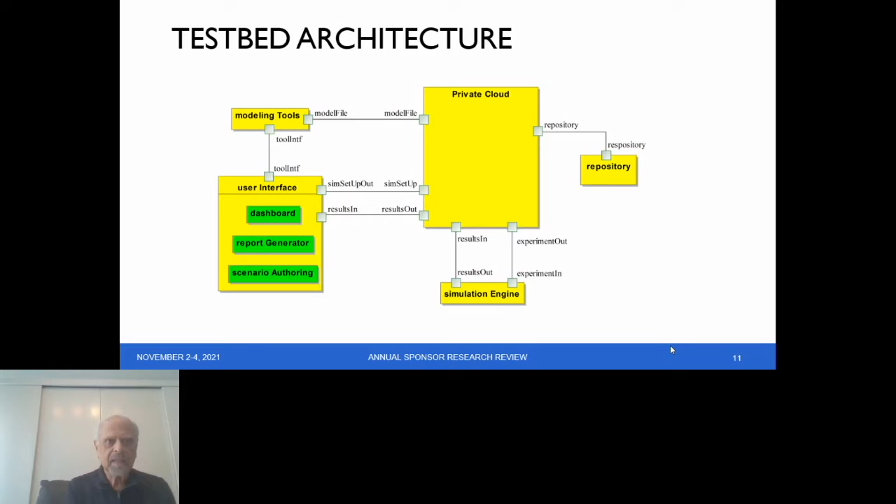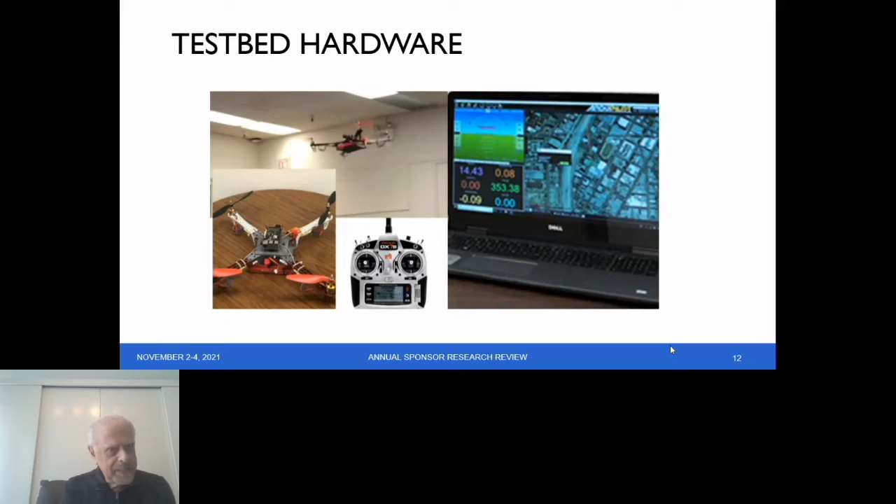The test capabilities: we offer a scenario builder to model and import scenarios from third-party applications. The testbed offers monitoring, visualization, and control of the simulation. We have a digital twin capability that we can create and use in-system simulation. We have the ability to control both the physical vehicle, which in this case is a quadcopter, as well as a virtual model of the quadcopter.

The data collection capability is based on the vehicle-mounted sensors that are used for post-hoc analysis. And we have the ability to capture the execution trace, which is the scenario execution audit trail, which is displayed on the dashboard.

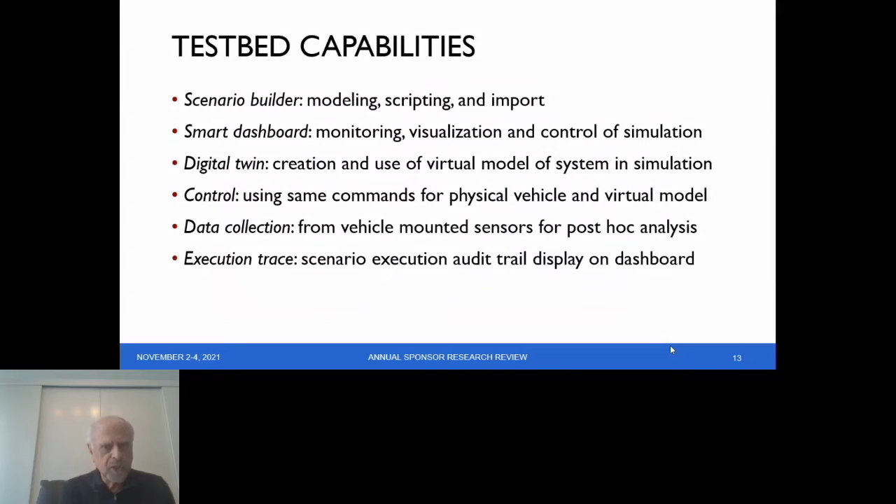The standard vehicle in this case is the physical quadcopter model. It's a pretty clean, simple design, which has ease of assembly, crashworthiness, which means it can crash without damage. And this is a lesson we learned. We needed to have something that was fairly robust to crashes as we were experimenting with it.

We have software that employs a discoverability component, which automates the vehicle network communication. It provides a plug-and-play capability, and the manual setup of vehicles using IP addresses is no longer needed with this capability.

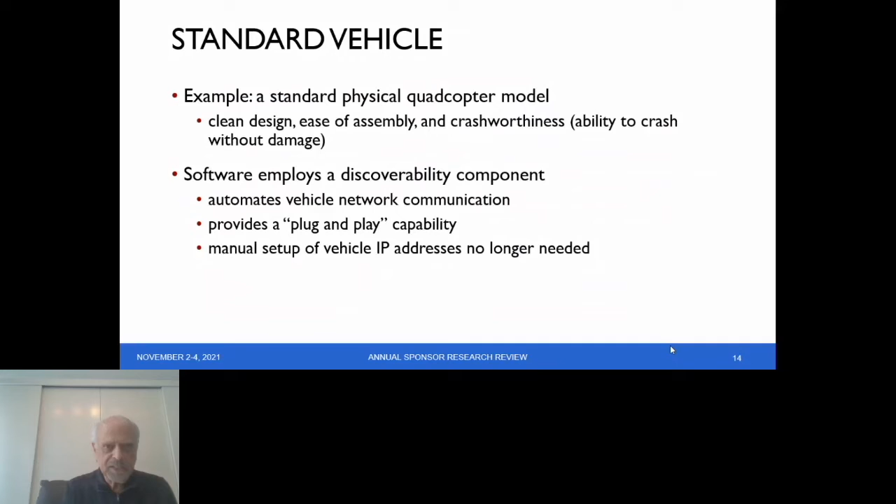The smart dashboard is scenario-driven. Importantly, it allows users to import scenarios. It's context-sensitive. Its layout is customizable. You can lay out the various panes on the dashboard according to your needs. It provides a default display option that gives you a plan view, which is also called the mission view of the world, showing the vehicles in that particular terrain.

It has various camera views. It has vehicle state indicators, and it has resource status indicators. It has the ability to accommodate human intervention. And when humans do intervene, they do so to either retask vehicles or to reallocate resources. It has an audit trail display capability that shows you when vehicle states change during the execution of the mission.

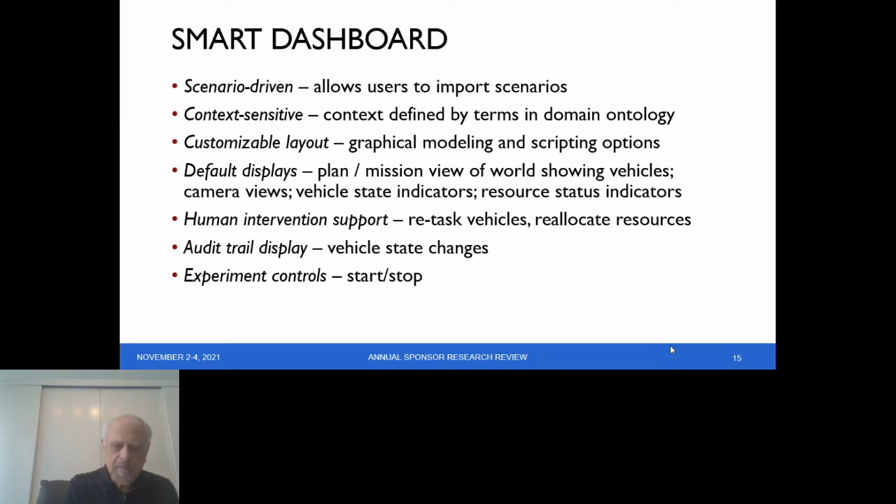And of course, we have the ability in the dashboard to set up and control the experiment. So you have start-stop facilities as well in the dashboard. The testbed provides a user guide. The user guide consists of a starter kit of predefined scenarios. Here, the users can use scenarios right out of the box in a simulation environment and later in the physical laboratory.

We also provide multi-vehicle control algorithms. Two types of algorithms are provided: a rule-based model, which is a deterministic algorithm, and a partially observable Markov decision process model, which is a probabilistic algorithm. We also provide scenarios and control algorithm documentation, and that contains basically how scenarios and algorithms can be created, and how scenarios and algorithms can be modified.

The scenario in our case is an aircraft perimeter security scenario. The context is that of a C-130 troop transport aircraft which has landed on an airstrip. It needs to maintain close surveillance of the aircraft perimeter. That's the challenge. The collection assets, or the sensors, if you will, are building-mounted video cameras and quadcopter drones with downward-facing cameras. So these are the two collection assets that collect the data in terms of maintaining the perimeter security of the aircraft.

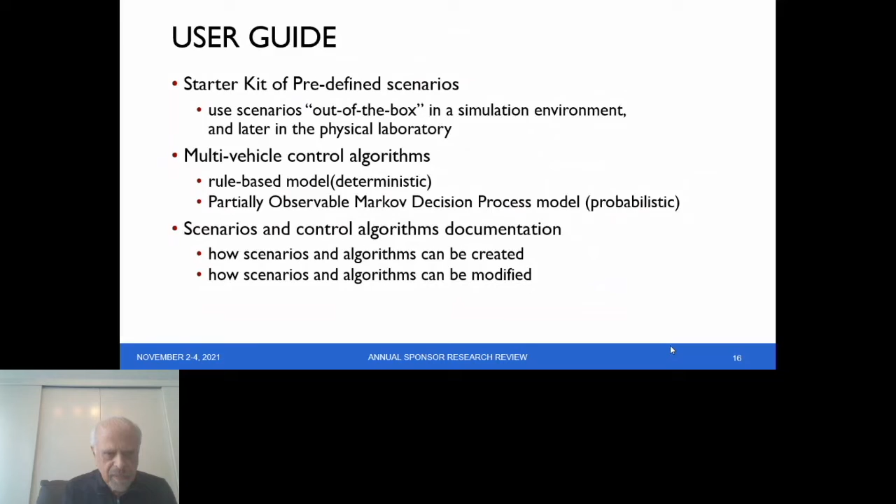The goal here is to maintain video coverage of the aircraft perimeter despite disruptions. And disruptions could take the form of, you could lose a drone, or you could have loss of a building camera. And of course, then you have to readjust your coverage so you can restore it the best possible way you can. The actions that you have available in this case are simple and compound. You can reposition a currently flying drone, you can launch a reserve drone, or you could do both.

System states are displayed using color codes. Green means you have full coverage of the perimeter. Yellow means that you're responding to a disruption. Red means that you lack the capability to restore full coverage. And if it's red, the cyber-physical system alerts the commander to intervene.

So here is the actual software implementation that is part and parcel of the testbed. In this particular case, what you see is the dashboard that shows you the scenario simulation. The problem domain, again, being addressed here is the perimeter security of the stationary aircraft that you see in the left-hand mission view window. The top right window presents a selected camera view. Below the mission view, to the left, is the mission log that presents all the state changes for all the vehicles involved in the mission.

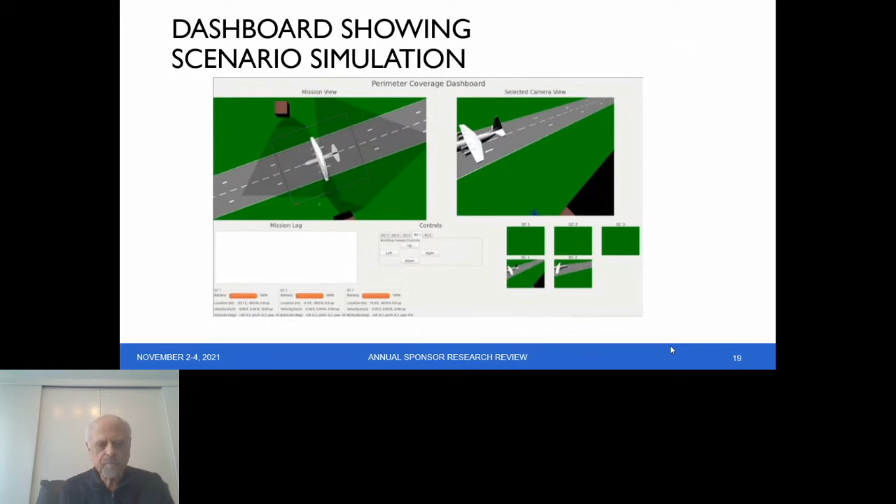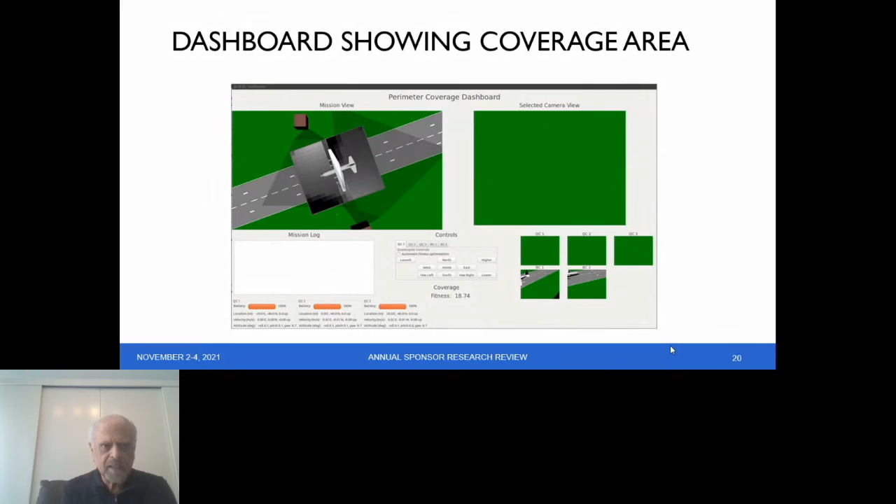In this view, you see the dashboard that shows the coverage area. The quadcopters in this particular case have not been launched yet. So the coverage that you see here is due only to the building cameras. And that's what you see in the left. All those shadows and things like that, the coverage that you see are the building cameras and the coverage that they have achieved. And it's strictly with those static cameras that you see that coverage, because no quadcopters have been launched so far.

A fitness function, by the way, is a particular type of objective function that is used to summarize as a single figure of merit how close a given design solution is to achieving the set of aims. So fitness functions are typically used in genetic programming and genetic algorithms to guide simulations toward optimal design solutions. We use that here to maximize coverage.

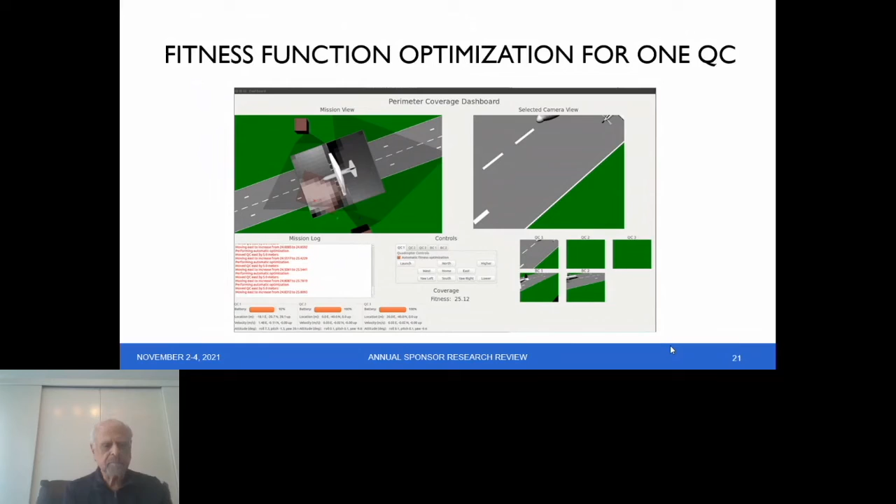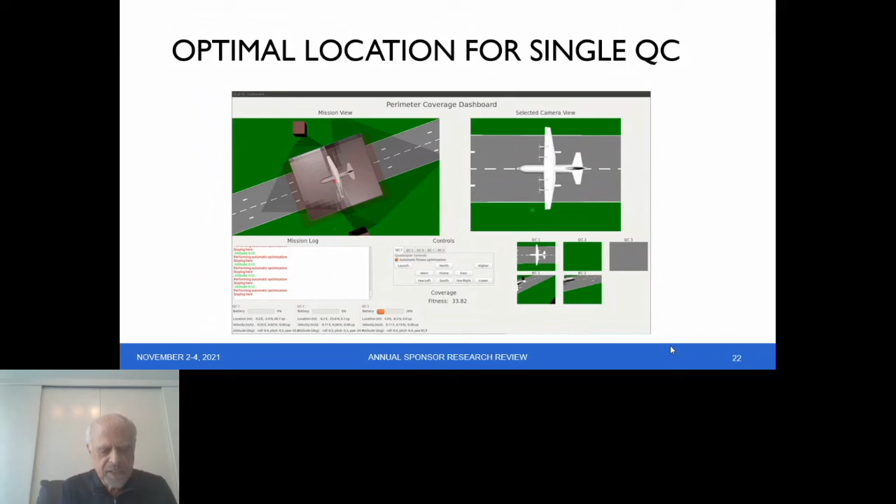Here you see the optimal location for a single quadcopter. So the quadcopter has been flying and it has found the optimal location. And in this particular case, if you look at the mission log, you see that the quadcopter has climbed 60 meters and yawed about minus 20 degrees to fit its field of view with the aircraft perimeter.

Here you see the same thing, but now you have 3 quadcopters and they have their optimal location. Once again, you can see at the bottom right the quadcopters, and you see in the center the coverage you achieve. And in this particular case, the coverage is much higher than the previous one because you've got 3 quadcopters, and the fitness function says it's 49.88, which you see in the center of the screen.

Interestingly, you will note that the selected quadcopter has rotated its field of view to concentrate on the east end of the perimeter in this case. That's what's happened in this particular screen.

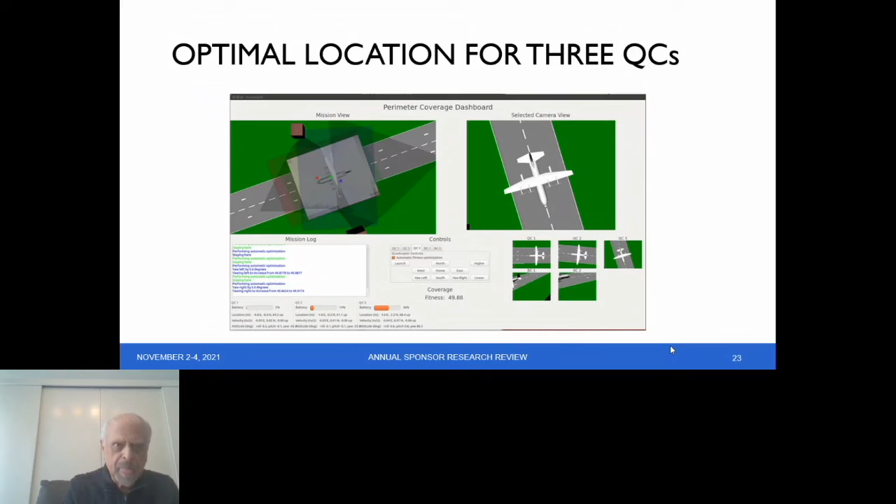Here you see yet another view, and this is a plan view of the terrain. This view can include not only the actual terrain and the various actors, but also any computed artifacts, which can dramatically increase the ability to interpret the scene. For instance, this figure shows the terrain for the perimeter surveillance scenarios and the computed artifacts, including the viewing volumes of the camera. Those things are shown here in these overlays.

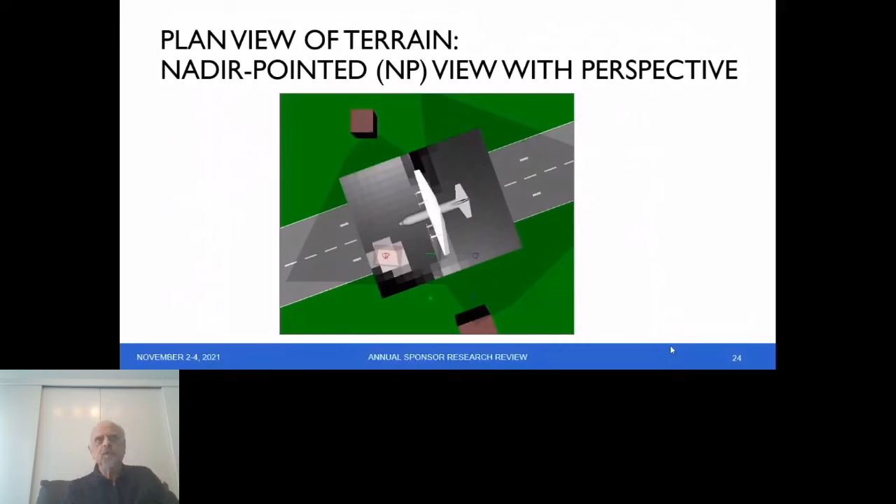It's called the nadir pointed view with perspective. The nadir is the local vertical in the direction of gravity at that location. So that gives you an idea of how rich the visualizations are. I've shown you just a few visualizations so far. We have many more that in the interest of time I can't present here.

Our successful transitions have been to the University of Arizona, the University of Virginia, to Professor Alejandro Salado, who's now at the U of A. And the second one is, of course, to Professor Peter Beling at Virginia Tech. And then the last one is the Aerospace Corporation, to Dr. Bob Minnichelli, who's head of the System Engineering Division there.

So now let's look at the benefits and payoffs of this testbed. It gives you easy entry into the field. You can start quickly with $0 investment by installing open source software and running pre-built simulation scenarios. We also use high volume, inexpensive consumer commercial off-the-shelf hardware. And that basically makes sure that you don't have any kind of a significant cost.

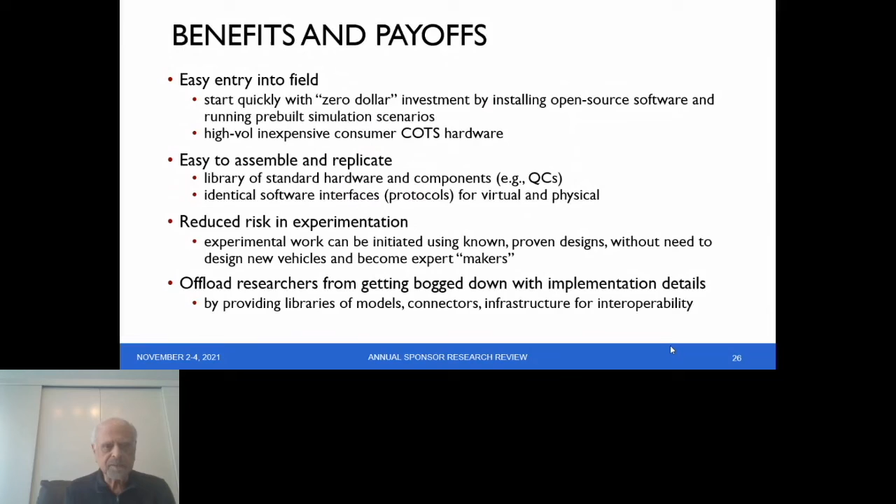The testbed is easy to assemble and replicate. It has a library of standard hardware and components, for example, a library of quadcopters of different scales. It offers identical software interfaces and protocols for both the virtual model and the physical system. It reduces the risk of experimentation, because the experimenters can work with proven and known designs without the need to design new vehicles and become expert makers. It offloads the researchers, in this case the SERC University principal investigators and their teams, from getting bogged down with implementation details. And it does so by providing a library of models, connectors, and infrastructure for interoperability.

It facilitates easy comparison. You have effective visuals, which are multi-perspective, multi-level, as you've seen, and you can compare results from multiple researchers to see which one does better in what context. We have the ability to enable best practices by having rapid dissemination of extensions. Anytime we have a modification or a new system that we have created, we can disseminate that to the systems engineering community. We have the ability to rapidly realize new integrated capabilities.

We have the ability to do cost-effective experimentation, for example, test models of vehicles and sensors, as well as algorithms, for example, optimization algorithms like I described, as well as machine learning algorithms like reinforcement learning. And we can test all that in simulation. It provides significant time and cost savings because we have a freely available backbone, which are the primary tools for creating experimentation environments. And as importantly, it allows the various principal investigators at these various universities to provide on-demand demonstrations to SERC customers as well as to internal customers within the university.

So in summary, what you've seen here is the work that we concluded a few months ago in building an adaptive cyber-physical human system testbed with a specific focus on model-based system engineering and researchers at various universities. Our focus is on cyber-physical human systems in general.

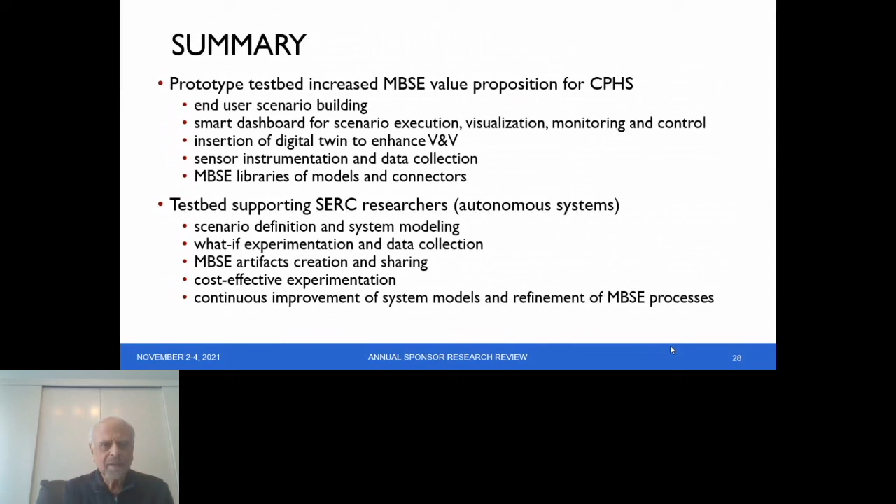I saw you already addressed one comment. There's another question here in the chat. Are you able to come onto video or hear me? I can hear you now. I think I just got enabled. Yep, I can hear you.

So we have a question here from someone in the audience. What skills would a user need to use this framework for performance simulation or other cyber-physical systems of interest? Well, we have tried to really lower the entry curve by providing a graphical interface, by providing a starter kit, and so far what we have distributed to the other universities, students are able to pick up and run with it, and most of these students are system engineering students who have familiarity with SysML, but we don't rely on SysML here to any great degree at all. You can use whatever modeling framework that you're familiar with.

So for example, in this particular case, because this is a probabilistic environment, we are using partially observable Markov decision process models in the experimentation. But because you've got these building blocks, and because you've got the kind of guidance that the testbed provides, you don't have to have a great steep learning curve. You don't have to know the details and the guts of the optimization algorithms or the guts of the machine learning algorithms to get some value out of it. So I have undergraduate students actually working with the testbed all the way up to PhD students.